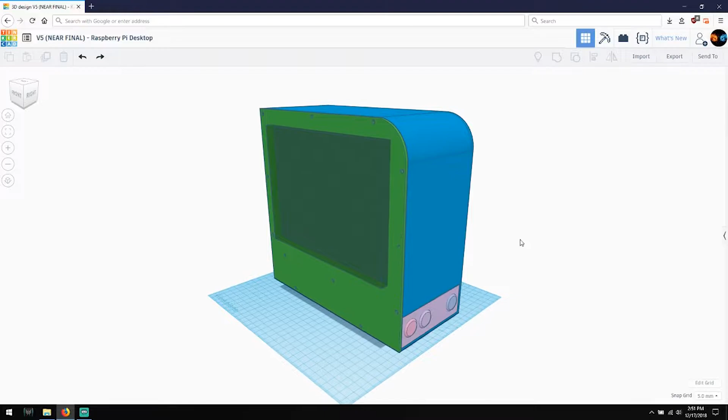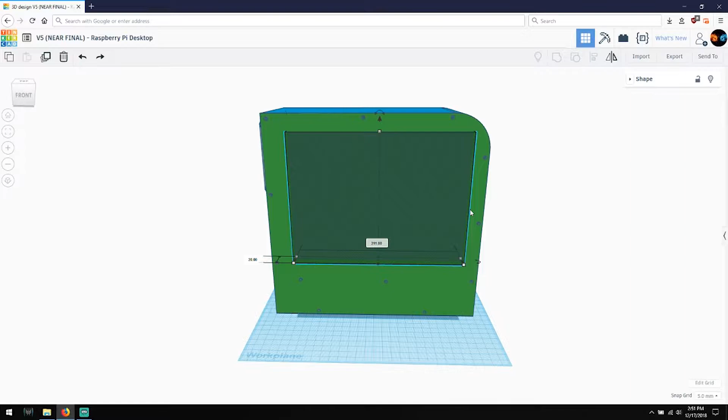So here we have an outside view of the entire case as it would appear put together. One thing to note right off the bat is that this transparent window here is not completely cut out; in fact it hasn't actually been applied yet, because I have yet to design the exact shape of the cutout window. I'll probably do that this afternoon. That's not going to be part of this video, but we're going to get into what else is here and what the layout is like.

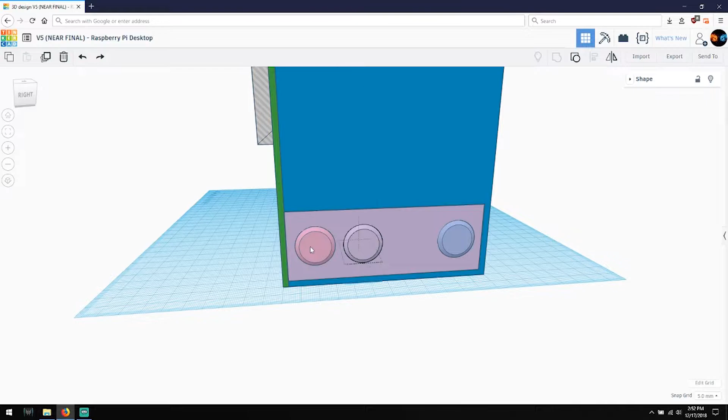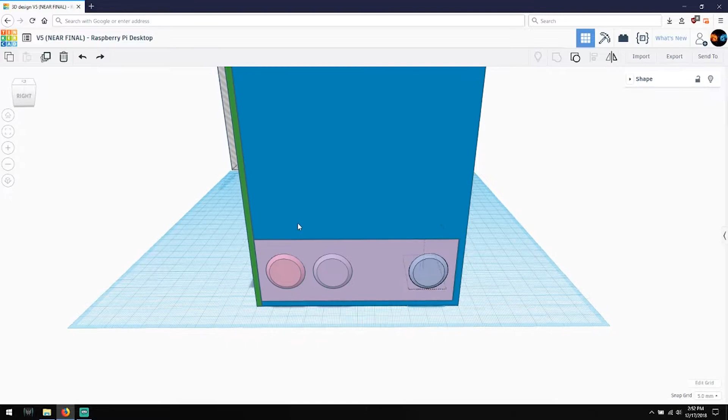Starting down here at the bottom, you'll notice I have 3 buttons, offset, 2 to a group and 1 on its own. This is the power button on the right. Next we have the fan and pump control for the cooling system, and the last one on the outside is the lights. These are push and latch, so you push it in, it latches on, push it again, it undoes the latch and turns off. Especially the power switch is not software controlled, it's a hardware power button, so if you hit this while the system's running, it simply shuts the system off.

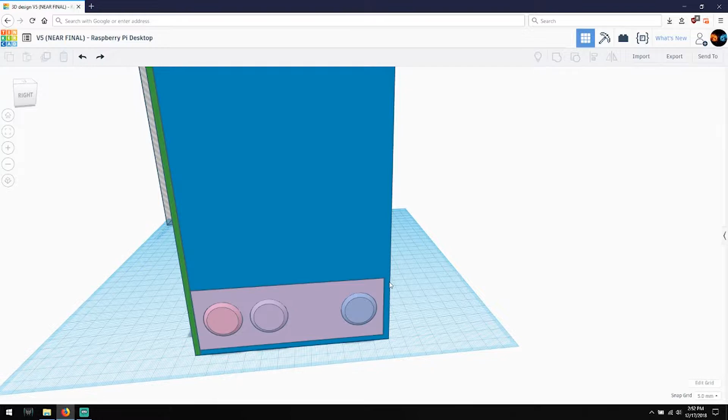Of course I'm the only one using this right now, this isn't public, so the design may change eventually, but this is how I have it laid out. The entire case will be printed in black, and you'll notice a bit of a lip along the right side that continues to the left, but there isn't one over here. This panel and the buttons actually end up being centered. So what we're going to do is take these two pieces here, take the panel and the cutout off.

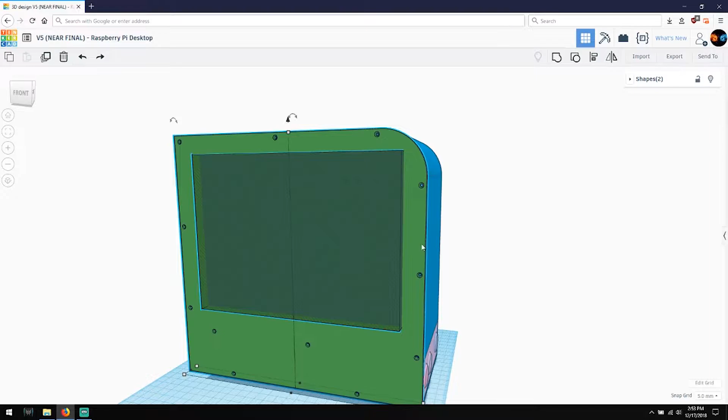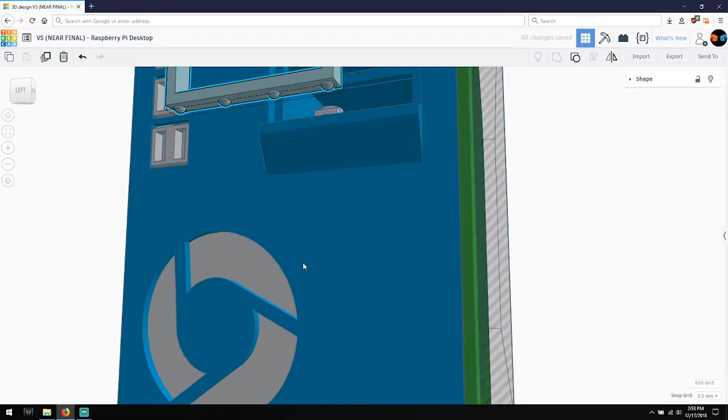But first we're going to look at the back, I'll show you what's back here. On the back we have a vent clip, this piece right up here. This is a separate printable piece that just pops off, and it has little tabs, little buttons that poke into this guy so you can flex them a little bit and poke them in.

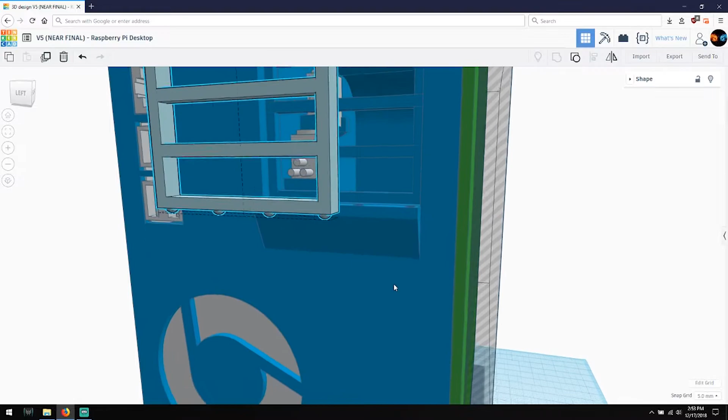What's going to go in between here and here is a 4mm wall air conditioning unit foam filter. This is used to filter out dust and air getting into the system to prevent dust buildup. It's not a perfect filter, but it's decent for right now, and it is upgradable. Everything gets pulled in here and out through the fan that blows on the radiator, which also prevents dust from building up on the radiator itself. So everything inside goes through the filter, and I can double up on the filters if I want to, they'll crush down. So let's go ahead and hide this guy.

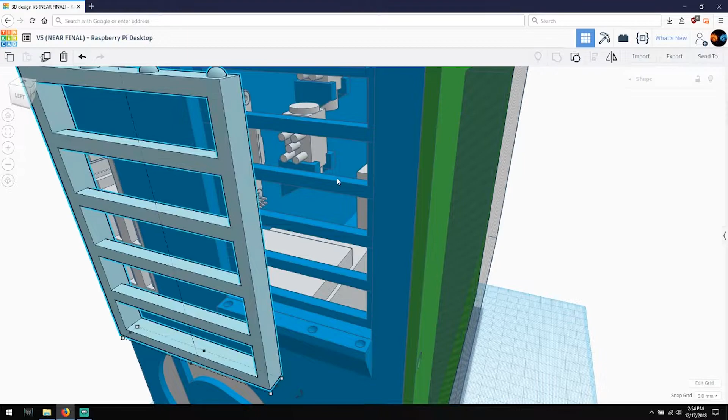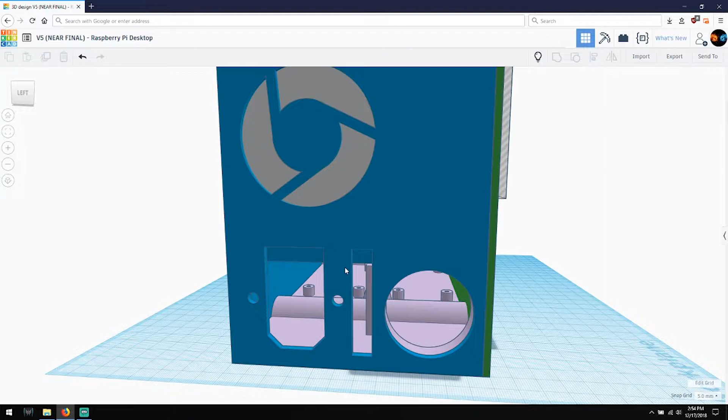Coming down to the bottom, which I'll explain here in a minute, this is where the power supplies and all the wiring end up, down underneath here. To cool the power supplies, which sit in this spot, the 12 volt, and this spot over here, the 5 volt, we have a 40mm fan, and this blows air in.

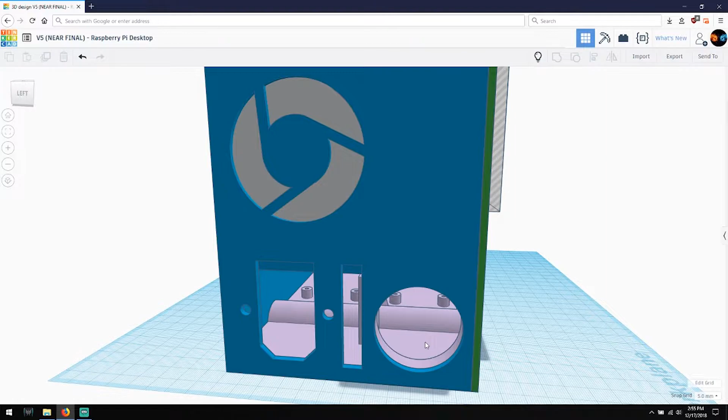It's basically self-contained, not quite a closed loop, but it doesn't interact with the air in the case. It blows in here, comes around the side, and back out this slot. I currently do not have a filter system in place, but I can design one later, and this tray can actually be printed separately, so I'm not worried about having it be perfect the first time around.

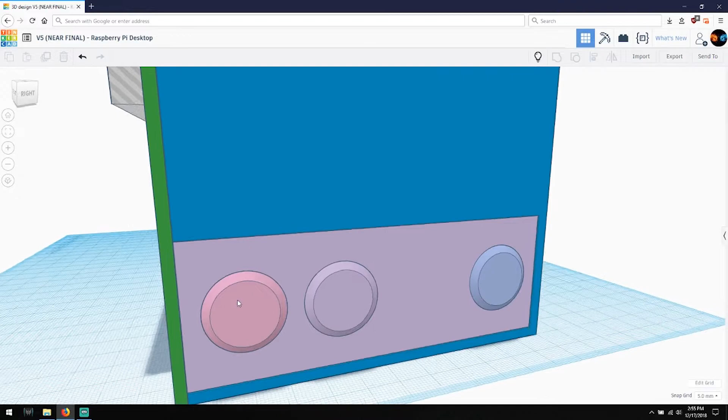The opening here on this side is for the electrical outlet. Your plug goes in here, with a removable fuse and a full system power switch. This power switch turns off everything, disengaging both power supplies. The switch on the front only turns off power for the Raspberry Pi after the power supply, and these two control the lights and pump after the power supply. So those only work if the system's on through this main switch. I have multiple layers of protection here.

Airflow pulls in here, goes around the corner, and blows out over here. I may upgrade that at a later date, but for now I think that's pretty much where I want it to be.

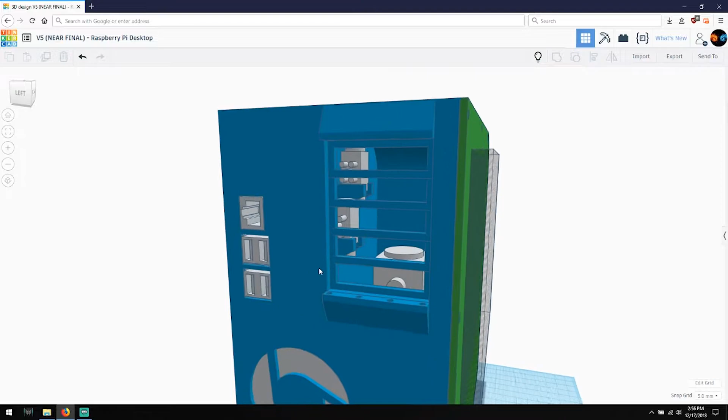Obviously you have cutouts for the Raspberry Pi, both the Ethernet and USB ports. It's upgradable to, say, an ASUS Tinkerboard if you want that—same footprint and everything, or at least it should be.

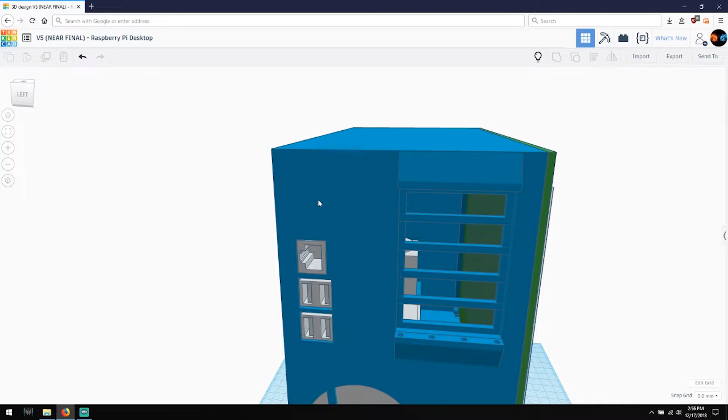The one thing missing here, which I'll get Thursday, is an HDMI panel mount connector. Once I have it in hand, I'm going to make a cutout here to mount an external HDMI connection that hooks onto the Raspberry Pi. It's a short, 6-inch connector with a flat right-angle vertical mount that connects here and goes right to the panel mount so you can hook up an external display.

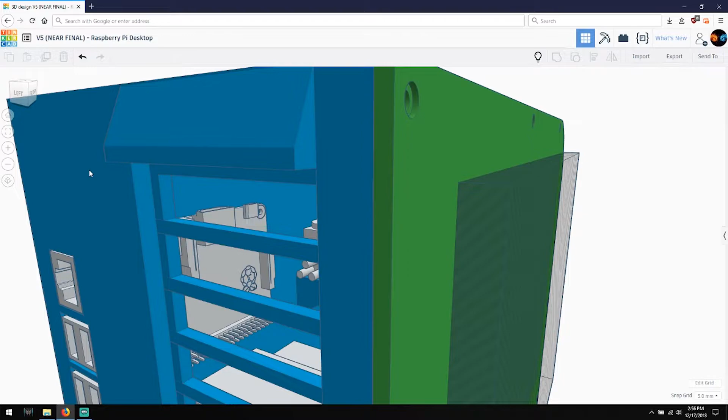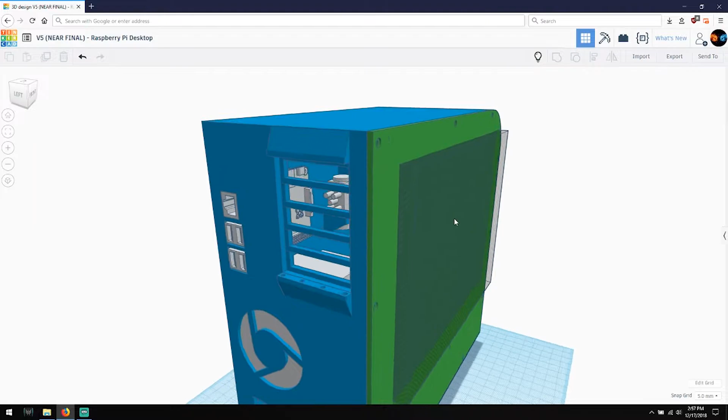So let's go ahead and take off these two panels and just delete them. Here is the inside—our components are all sitting here together, everything in silver. If we remove these, we're left with what is going to be the shell.

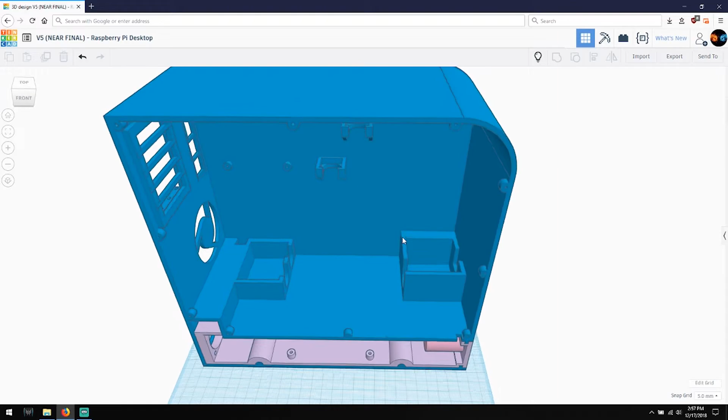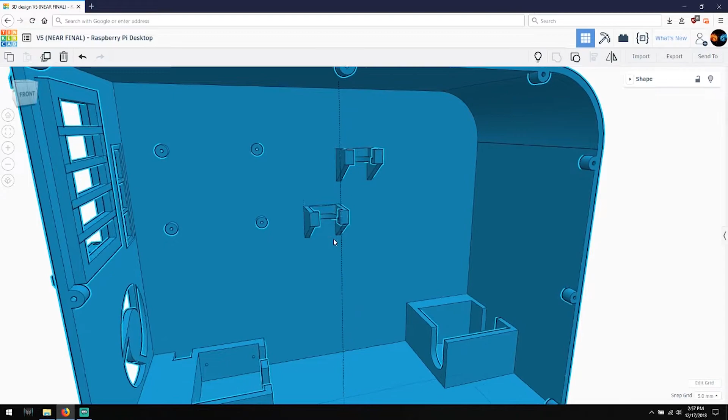Everything has been measured and checked multiple times. I printed off little test clips to make sure the distribution blocks fit inside and the hoses squeeze in, all that kind of stuff. I measured the distance between the center holes compared to my physical Raspberry Pi, and they do fit. I went ahead and added these little guys to the side.

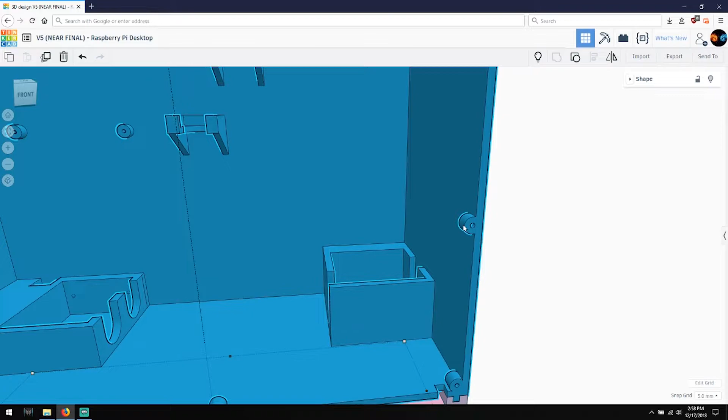These are to take little laptop screws—I have a whole tub full of these things. There are 12 in total that run all the way around the outside and hold the side panel onto the main case. I designed them to require as little support as possible from the bottom without getting too overly creative or taking up too much space, and as close to the outside as possible so they push on them to screw in, so you don't risk breaking them and having to reprint the whole frame.

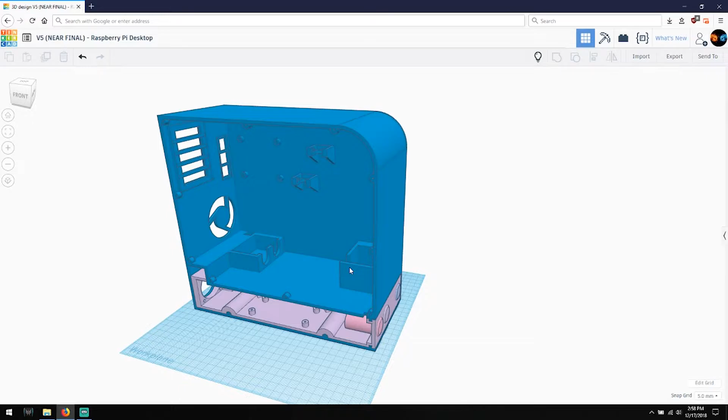This entire frame, last time I ran it through Cura, was going to take about 45 hours to print and around 390 grams of filament—a little less than half a spool. That's quite a bit, and it's going to take a long time, but I'm okay with it. I'm hoping to only print this once.

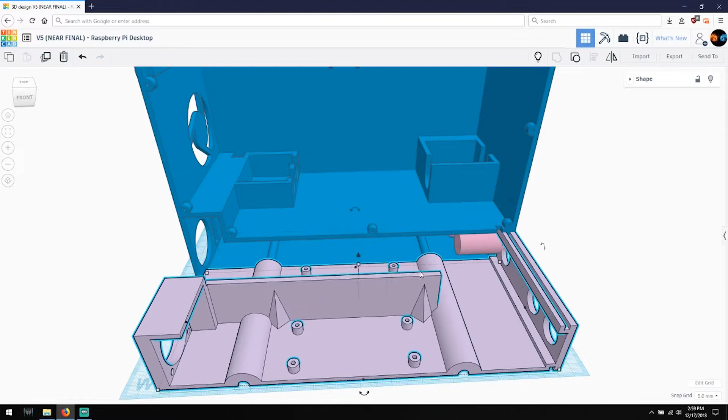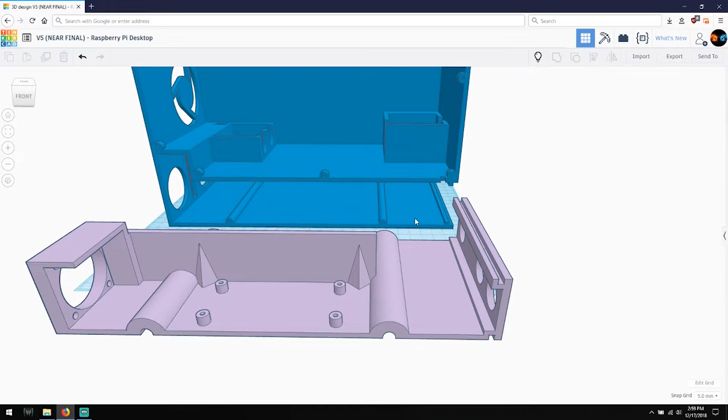So let's go on down to the next part, and that is the bottom tray here. This was literally made to slide in and out—that was the whole point. This tray is designed, with a 0.5 millimeter tolerance, to slide directly into a case like this. This front panel supports the case vertically, as well as giving support for the buttons front to back.

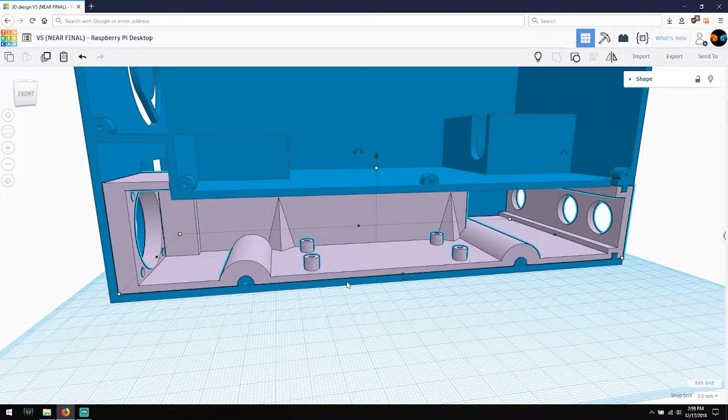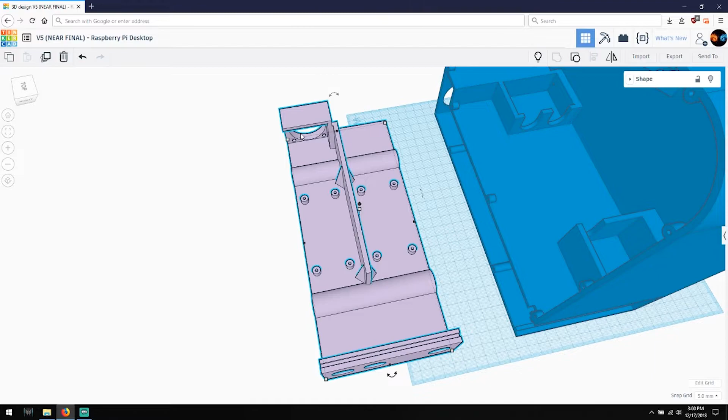Again, it's got a mount for the fan. Let me pull this back out here and move it all the way over so we can see. These four mount points are for the 12-volt power supply, mounted on this side specifically so that the fans for the radiator and the pump for the reservoir just have to cross this little bridge right here and end up at the power supply. I can feed the 12-volt fan in the back, a little 40mm fan, directly from here without running more wires than necessary around the other side.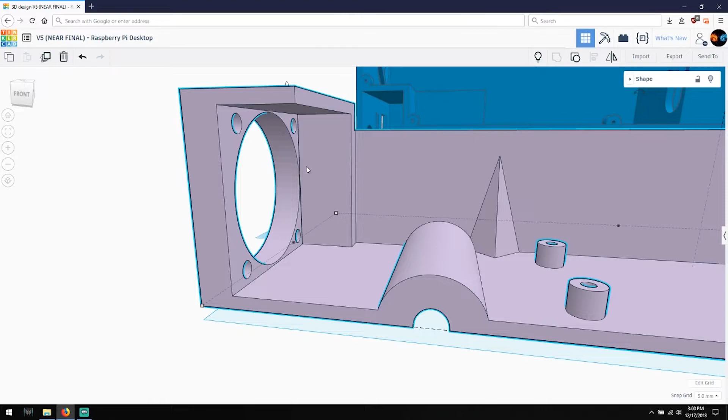The fan does fit very snug. It's actually got a 1mm difference in both width and height, so it's not a super tight fit, but you'll notice what I did here.

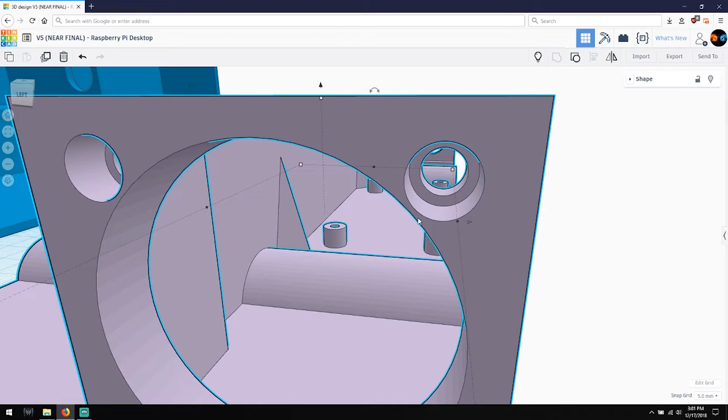Oh, this is pretty clever. I added a little extra cutout so I can put a nut and bolt through here rather than a piece that would grind into the plastic. That lets me make this a little thinner with a completely cylindrical cutout. The fan goes on the back, and this extra recess allows the bolt head to sit inside and not protrude past here, because remember, when this goes in...

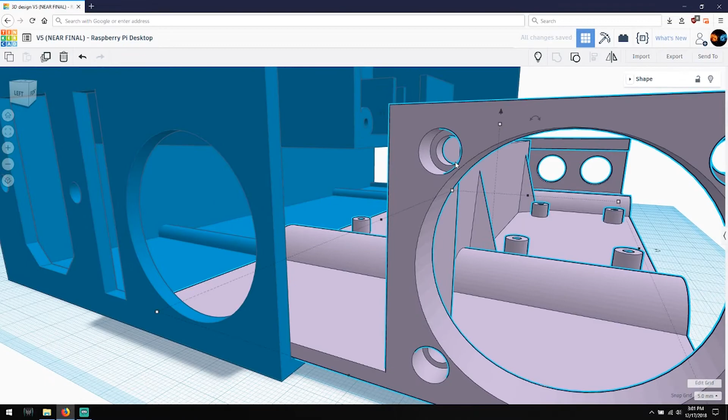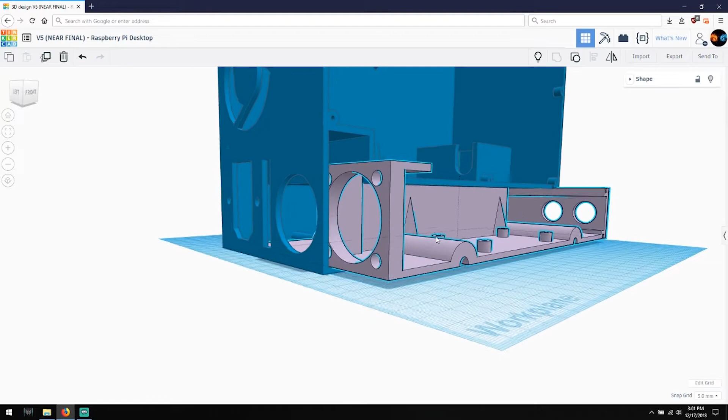There isn't a lot of room. Again, left to right, there's a 0.5mm tolerance—0.5mm on the left side and 0.5mm on the right side, so there's a little bit of play. This isn't meant to be 100% airtight, but I did want things to be as close proximity as possible.

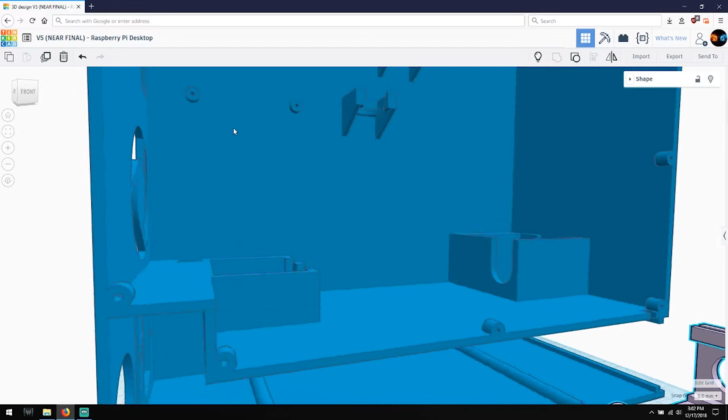On the back side here is the 5-volt power supply, and it's specifically on the back because if I run a wire out here through this hole that's in the back, behind one of the fans, which is accessible right there, you can just barely see it, that'll run up behind the fan, behind the Raspberry Pi, and then hook in right here to the micro USB.

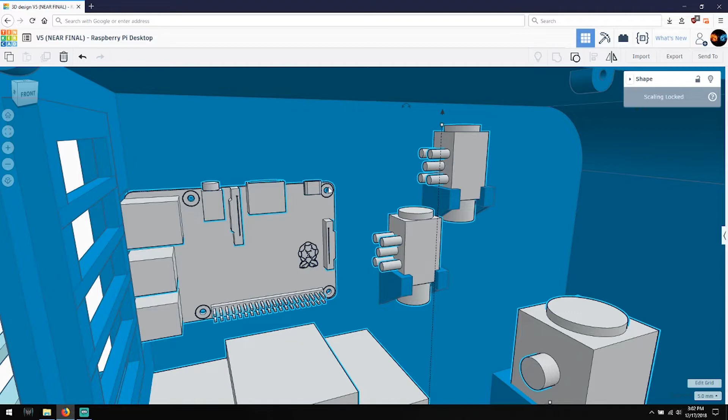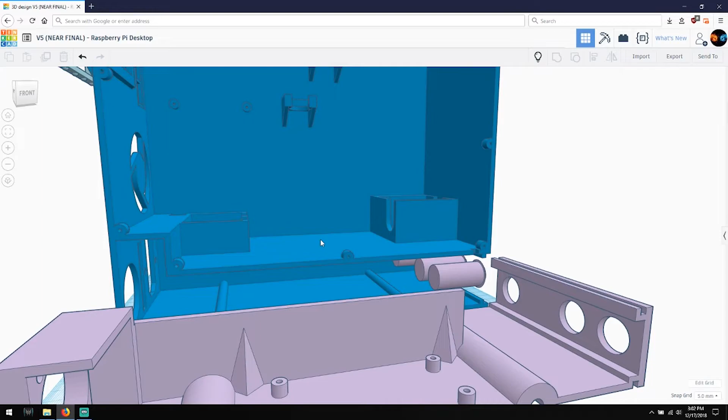So I'm actually going to cut off the micro USB cable and make it plug and play instead of hardwiring it. I want to be able to upgrade or swap the board out if something happens. So yeah, the 5-volt power supply is only for the Raspberry Pi, nothing else, so I can't get any spiked power draws or anything like that, and the Pi gets a consistent 5 volts. I believe this is a 5-volt 3-amp power supply, so it should be consistent.

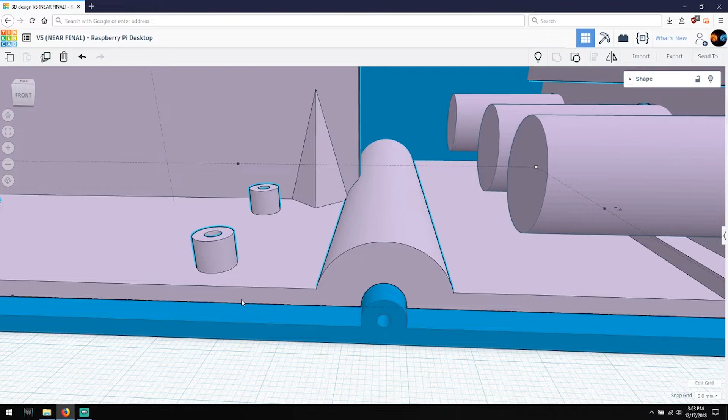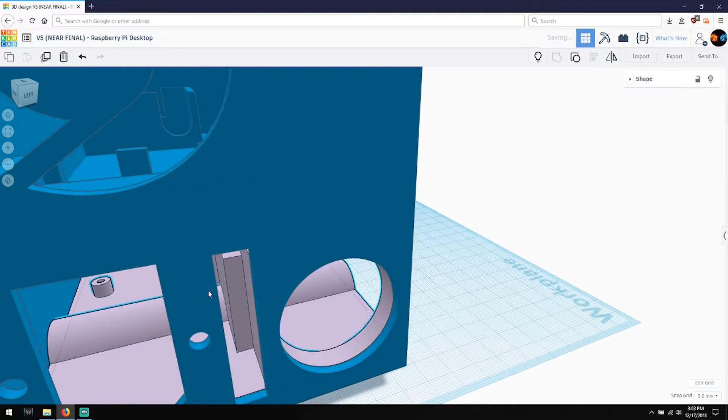Another thing to look at in this design is these arches. I specifically designed the arch to allow it to go over a bump. That prevents the entire tray from sliding left to right, and also guides it straight back into the cavity, along with where the front panel switches mount here. You have those guides, the 2 guides for these bridges, then the little gap that's in here. This will not affect the wiring for the AC outlet, back here, because nothing ever passes by it. That's why the AC outlet's on the back. I specifically oriented this outlet so that the cord is as close to the bottom as possible.

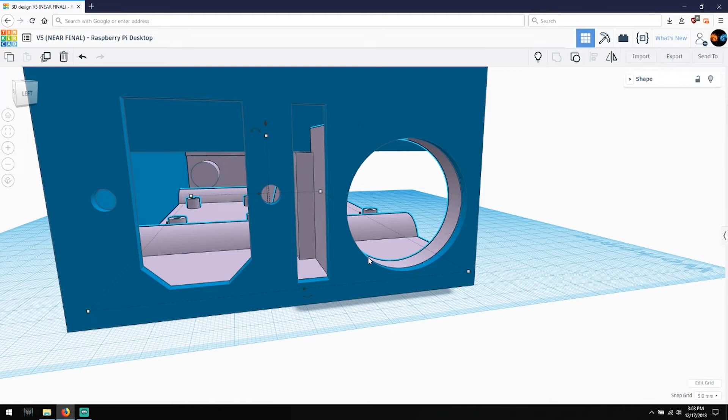I didn't want anything sitting up high, especially if you turn this a little bit so you can see the wires. You don't have a whole bunch of wire hanging down behind it. You want to see as little as possible. So that was completely intentional as well. Yeah, really, that's kind of about it. I mean, it's pretty simplistic.

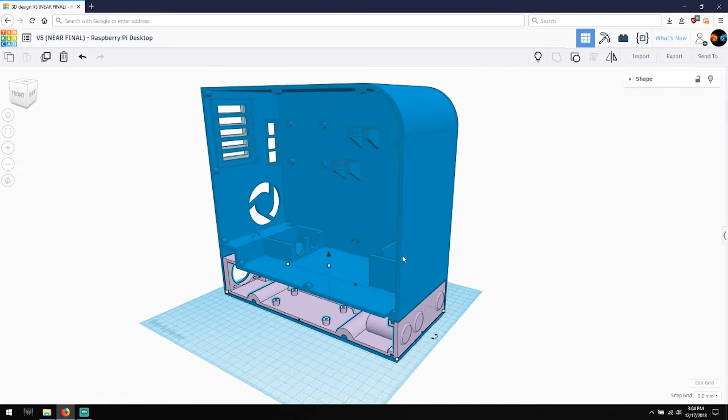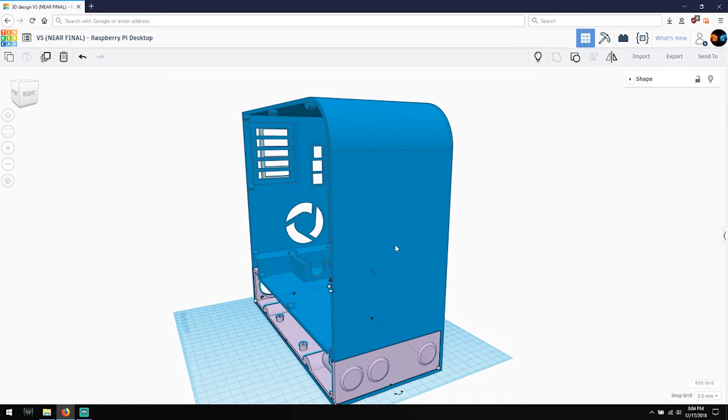I did also want to change the shape of the tower case, so I rounded off the front here. I've got a bit of wasted space right here, and it's going to be a completely blank front. I'm okay with that. Down the road, I may end up putting something here that you can swap out for a design, maybe an LCD screen of some kind, even a second Raspberry Pi sitting vertically right in here that only drives a display.

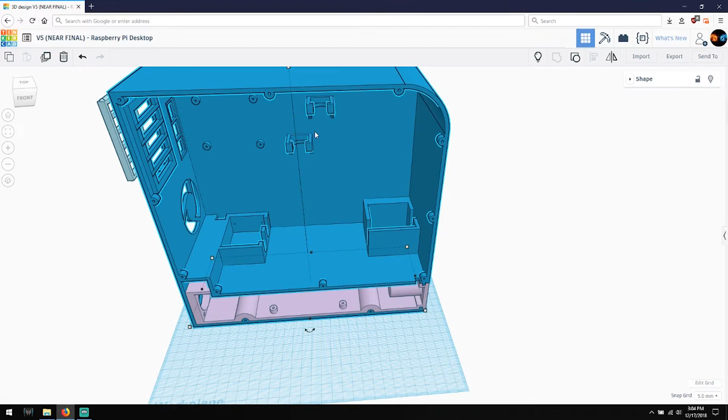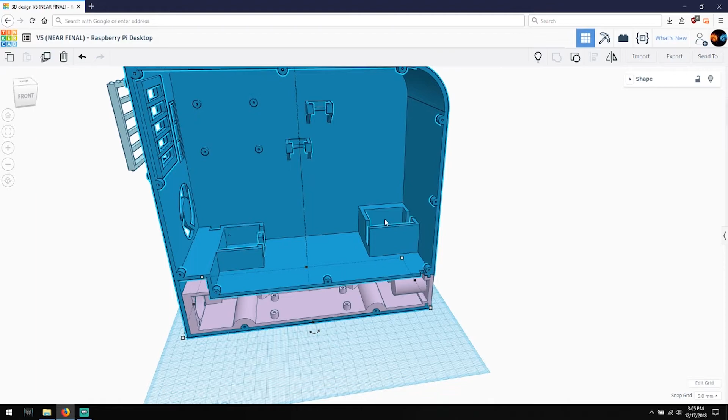I could do that. There's a whole bunch of possibilities with this case. But I do have all of the components here on the side, each of these individual pieces. I have each of the brackets, the spacing and mounting for the pins, and the cutout for the Raspberry Pi in the side of the case. I have the fan cutout, the electrical outlet, and both of the cavities for the reservoir and the radiator. So all of this stuff is modular. I can just drop it into another case and go. Making another one or upgrading this one is super easy.

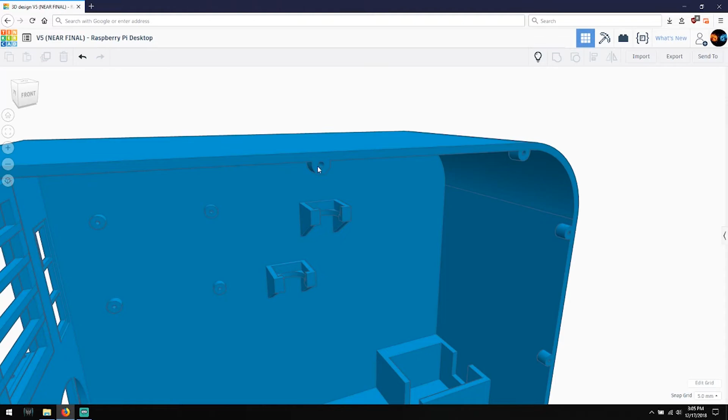A future version is probably going to include magnets, which are going to replace these screws here. I need to look into getting a series of rare earth magnets that I can use to replace these, which means I'll have a little bit bigger spot, but all you have to do is snap the cover on and off. It may not line up quite as well, and I kind of like the idea of the screws, but I'll give something a try with magnets. That works.

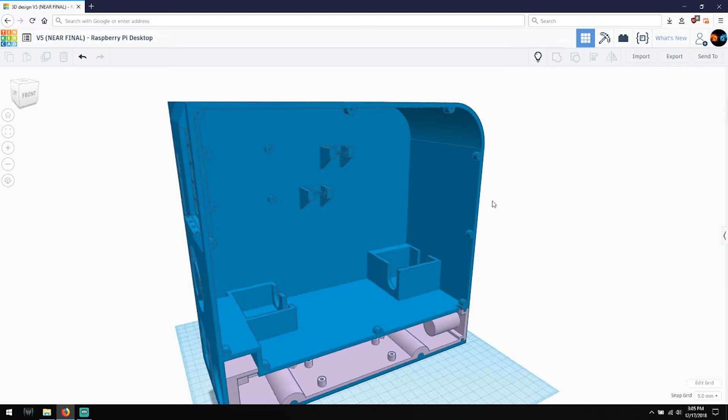So yeah, this is kind of how things are sitting right now. Hope you guys like this. I put a lot of work into this guy. Give me some suggestions.

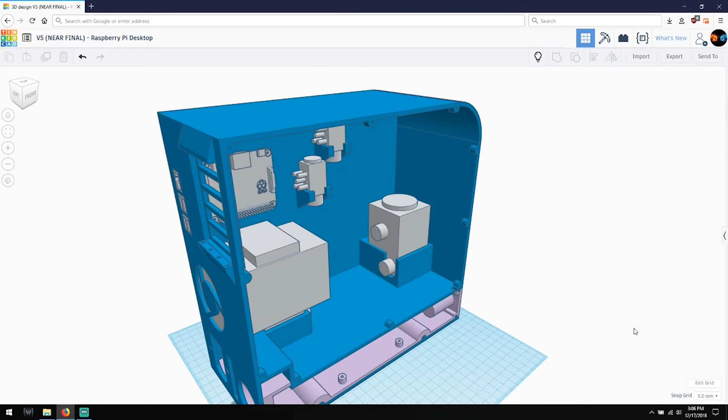This thing probably won't be finished until after the first of the year. I'm not going to be able to make the Christmas deadline. Unfortunately, some stuff that I'm waiting on from China has yet to arrive. As far as I can tell, it's past customs, but that's the last I've heard from it, and that was about 4 or 5 days ago. So I'm probably not going to make it in time. If it shows up at the door, great, but don't expect this by Christmas, unfortunately. I thought I was going to be able to, but yeah, hope you guys enjoy.

If you have any other suggestions, go ahead and let me know.